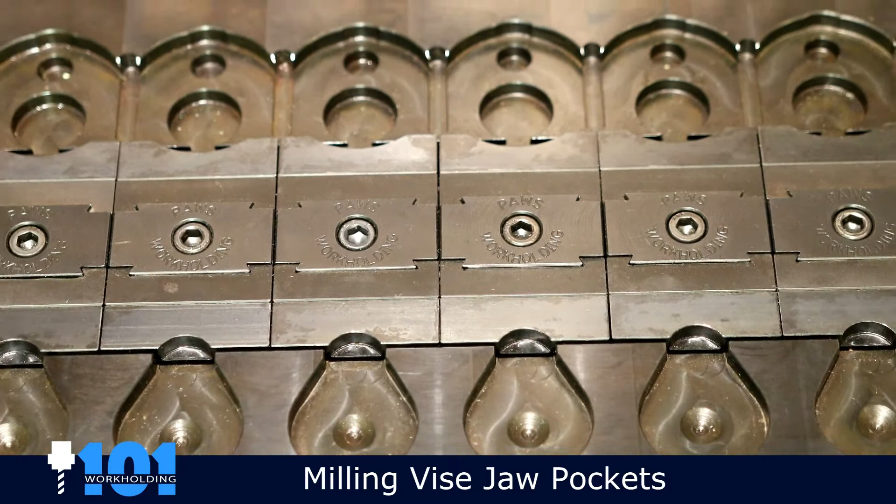So we have a production facility here, and what you're seeing is an example of multiple pockets cut into a jaw set. Generally, to grip in this case a round saw cut billet in the first orientation, and then machine the part complete in the second orientation.

So how do we grip a round part in our jaw pockets? How do we cut these pockets out for both orientations? What are the things we need to be thinking about when we do this? This particular fixture will hold 8 orientation A parts and 8 orientation B parts for a total of 16 parts under the spindle on each load.

So the part that we're looking at fixturing up today is this part here. We call it a peanut because it's got a profile that looks a lot like a peanut shape. It's actually called a flange. It's got a boss on it, a couple of bored holes in it, and this is the part that we're going to process.

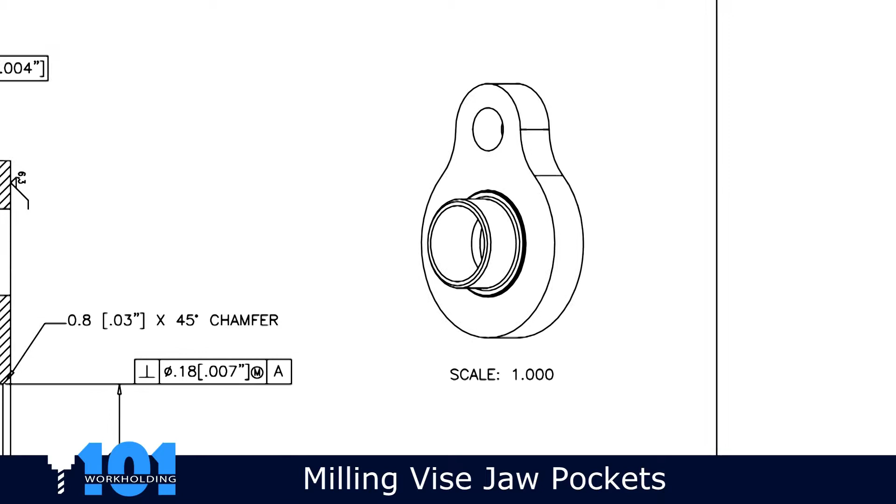It's generally made in 2 orientations. So we're going to need to cut pockets for our orientation A, which is the raw billet, where we're going to come in and cut our profile out and bore some holes, and then we're going to flip the part over for our orientation B and make the part complete.

So once you have an idea of how you're going to process the part, in this case we're going to do 2 orientations, the next thing you've got to figure out is your material size. So we need to go through and figure out how to do that based on the part itself.

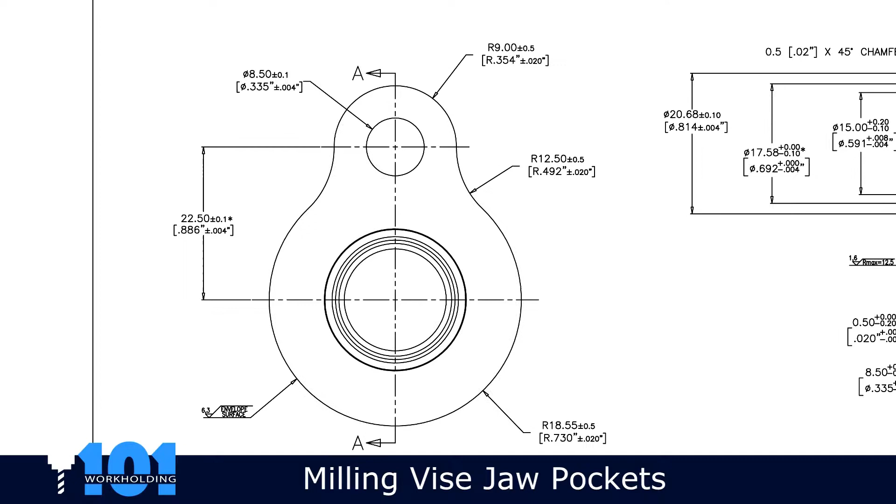So in looking at the print, when you add everything up, the part has an overall length of 1 inch 970. So we're going to go with a standard 2-inch size stock, to have about 30 thousandths worth of material to clean up, or about 15 thousandths per side.

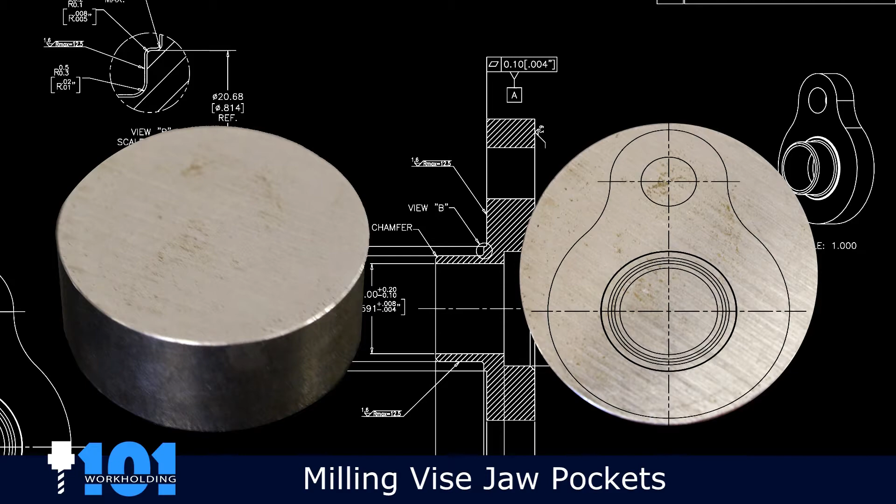In some cases, based on how your stock size varies, you may want to give yourself around 60 thousandths of extra stock to have 30 thousandths a side for cleanup. In this case, our stock's pretty consistent, so we feel pretty comfortable going with the 2-inch size stock.

So the next thing you want to think about once you pick your material size is your pocket depth, or how much material do we want to hold on to. In most cases, it's a pretty good idea to start with around 200 thousandths worth of material to hold on to. That's usually adequate to cut at the feeds and speeds that you'd like to be cutting at. So as a general rule of thumb, 200 thou is what you want to be gripping on.

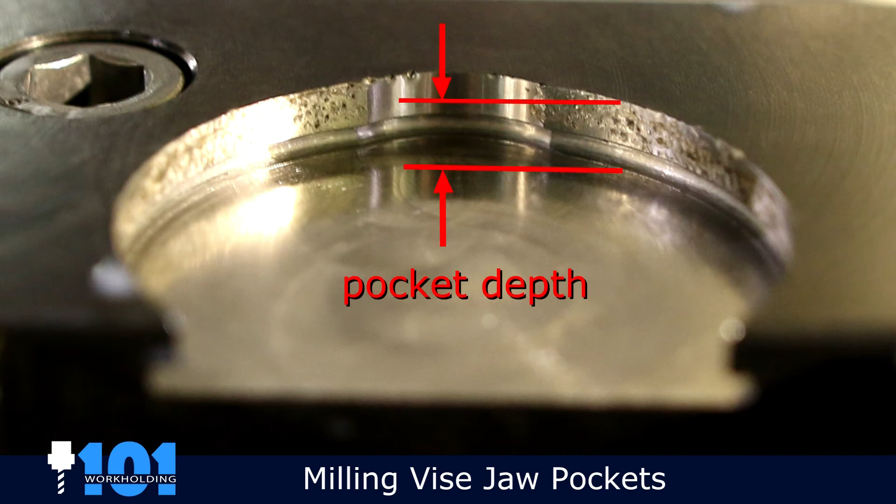When you start gripping on less than 200 thousandths, you can run into problems with your cutting forces exceeding the gripping power of whatever workholding system you're using, and at that point you're getting into toe clamping applications and have to be real careful about your machine feeds and speeds, or the cutting forces can rip the part right out of the jaws, and that's not a very safe situation.

One other thought about the amount of material you want to hold on to: obviously, if you want to hold on to more material to cut more aggressively, that's safer, but it comes at a cost, because the more material you're gripping, the longer your billet size saw cut is, so you're going to end up using more material. In a production milling environment, you want to optimize your billet length so you can cut as aggressively as you want, but use the least amount of material possible.

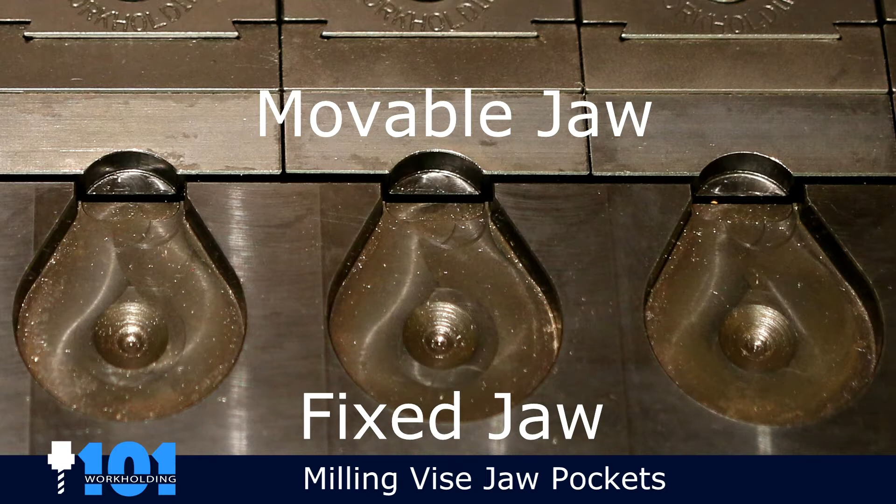So with most vise systems, you have 2 sets of jaws, a fixed jaw and a movable jaw. The general idea is to cut a profiled pocket into the jaws, so when the clamping is activated, you squeeze the part with enough force to obviously hold it during the cutting operation.

Vises come in many different shapes and sizes and have been around in the manufacturing environment for a long time, but the principle works the same on all of them. The movable jaw gets pushed against the part, and the part gets trapped or nested against the fixed side so that it's held with enough power to handle the cutting forces being applied.

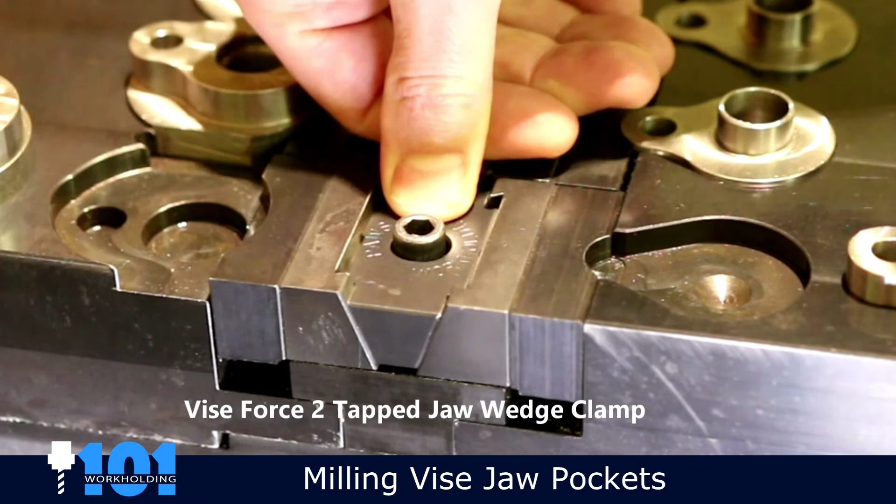Traditionally, most vise systems are opened and closed by hand or by manually cranking a handle. This is fine in most job shop environments or if you've got a low production run, but in production milling, the time it takes to manually open and close a vise system can really hinder your productivity and efficiency.

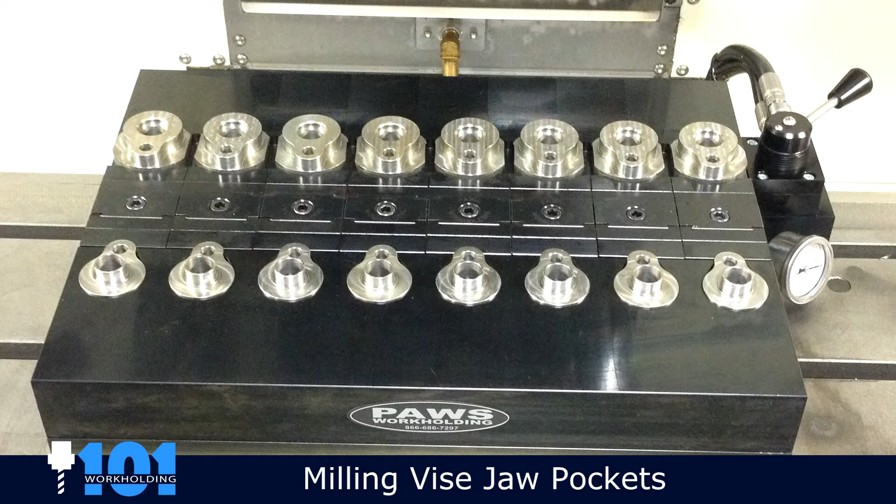The vise system we're using in this lesson is called a multivise. It's a system of 16 densely populated 2-inch vises activated using a wedge clamp. The wedge clamps are pulled down using a socket head cap screw, and they push a movable jaw in two opposite directions with equal force, generating up to 3,500 pounds of holding power per jaw.

These types of systems can be useful in production milling environments for a couple of reasons. First, these clamps are low profile, allowing you to get more part density under your spindle and take advantage of multiple part work holding. There are many benefits to this idea that we'll get into in an upcoming video and discuss in more detail.

Second, these systems are useful because the clamping can be automated. With the flip of a switch—in this case using hydraulics—in literally 2 seconds you can clamp and unclamp 16 parts in this multivise system. Clamping and unclamping manually takes a lot more time, so the loading and unloading sequence takes longer and you lose efficiency, resulting in spindle downtime, which is generally not good for a production milling environment.

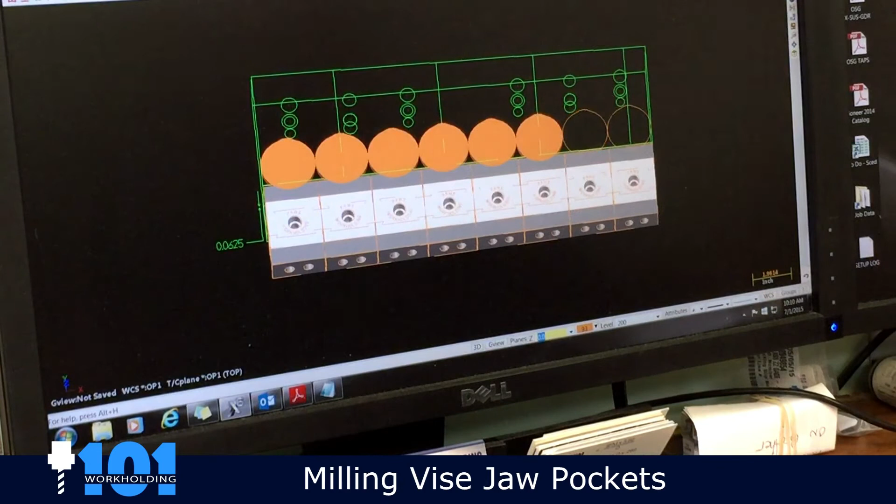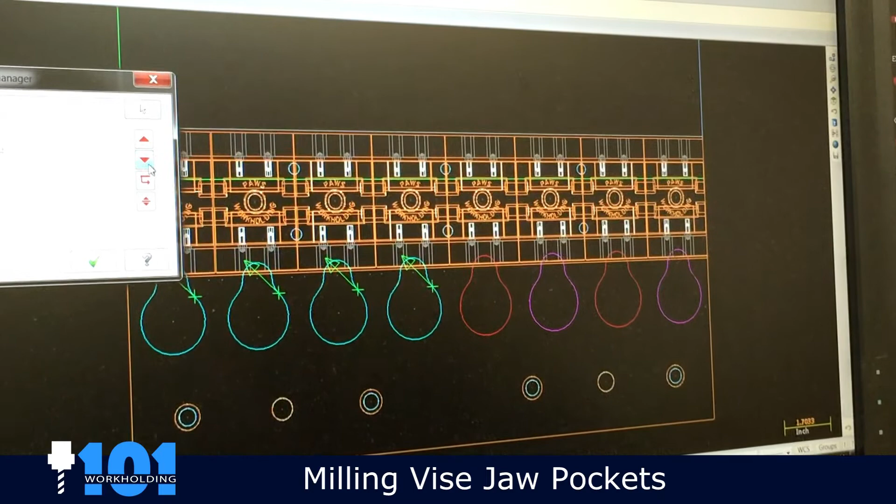So let's get into the steps you need to go through to mill the pockets. Most manufacturing engineers or machinists, once they have the material size picked, will pull up a CAD model of whatever jaw set they're using and draw the pocket profiles into the jaw sets on both the fixed and movable side of the vise system. The CAD program will typically create the machine code needed to cut the pockets based on the tool information you feed into it.

Once you have the program written to cut the pockets, you'll put it on a jump drive or something similar, take it out to your machine, load the code into the CNC machine, and have the vise system located on your table. You'll begin to prep the vise system, create zero points, get your shim set out, and we're going to get into the purpose of the shims when machining pockets into vise jaws.

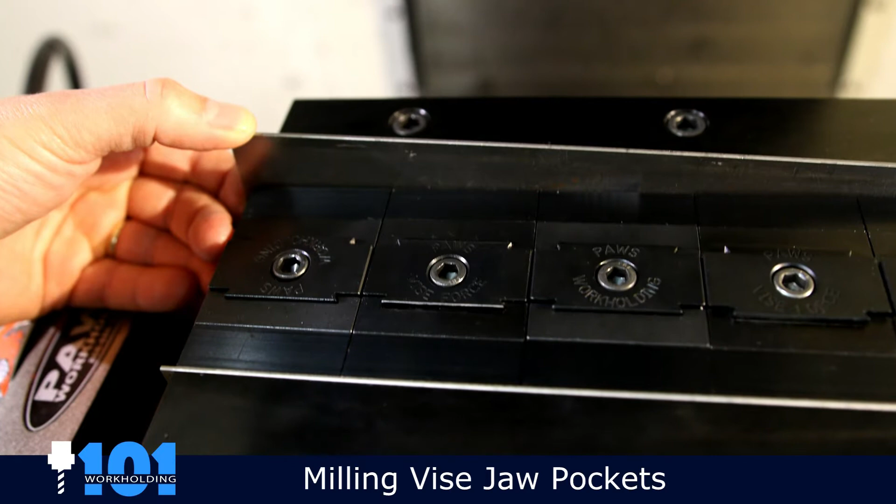You'll need a shim set to put in between the fixed and movable jaw. The shim sets we use are about 1/16 of an inch, or 62 thousandths thick, and they work pretty well for us. You put the shims in, tighten your vise system down or clamp, and then machine the pockets.

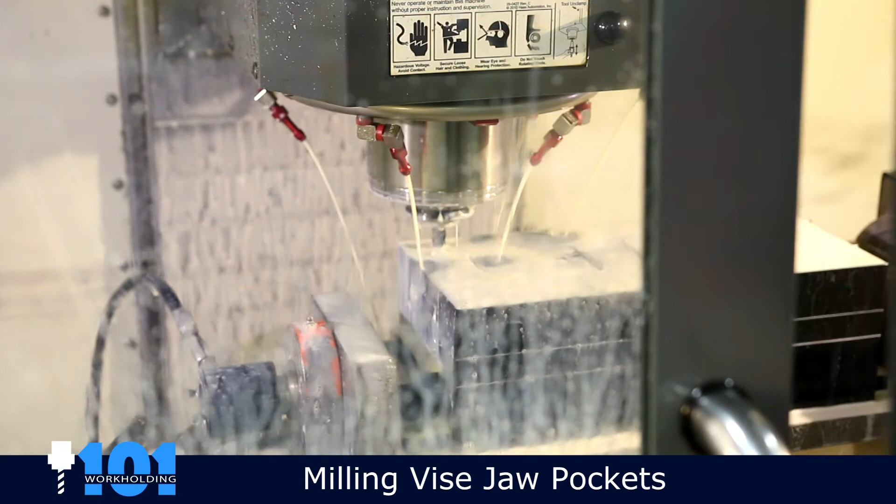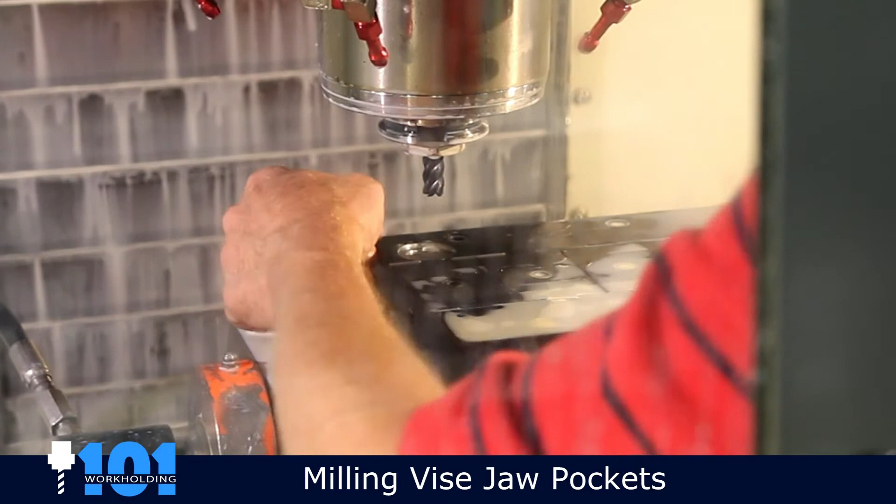The shims are an important piece of the process because if you machine the vise jaws without using them, you could run into a lot of trouble with your holding force or gripping power when you actually clamp your vise system. In other words, when your vise system closes, if you machine the pockets without the shim set, the travel in your jaws will bottom out at the same time you start gripping the part, which won't create much holding force, and it's highly likely you'll rip the part right out of the jaws—creating a dangerous situation.

So by using the 60 thou shim set, what that allows your vise jaws to do is give you that 60 thousandths worth of travel once the jaws engage the part, to hold on to it properly so that you don't have an issue with the part being ripped out of the pocket.

So let's move on and discuss a couple tips that'll help you in your work holding practices and make your processes more effective. One of the first things we want to talk about is something we call the 75-25 rule.

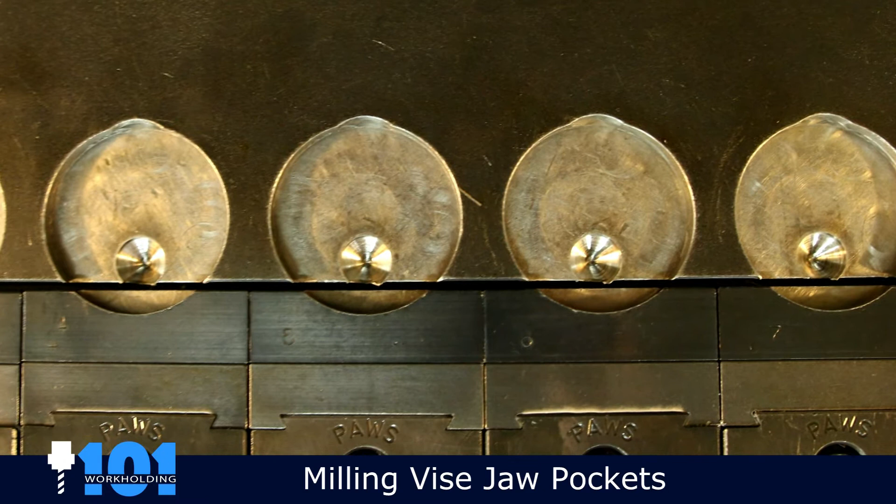It has to do with the position of your pockets in the movable and fixed jaws. You're going to want to machine your jaws so that 75% of the part is seated on the fixed jaw, or the non-movable side. This allows a little more rigidity and the ability to locate the part properly, and it also helps with keeping the part flat and provides more of a base for tapping the part down.

Another work holding concept we want to discuss is this idea of 2-point, 3-point, 4-point contact when gripping a part. In this example we're holding a 2-inch round billet, and it's pretty common to cut your pocket diameter maybe 5 thousandths bigger than the actual diameter of your material so the part will fit in and out of the pocket for ease of loading and unloading.

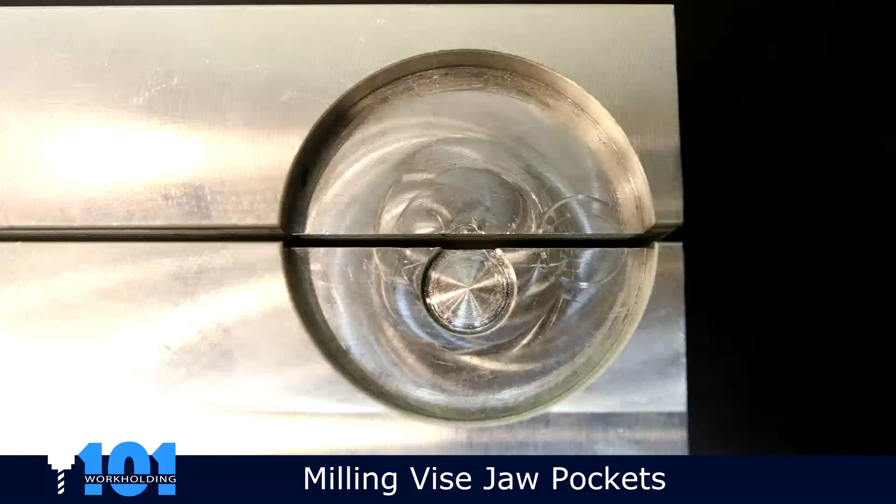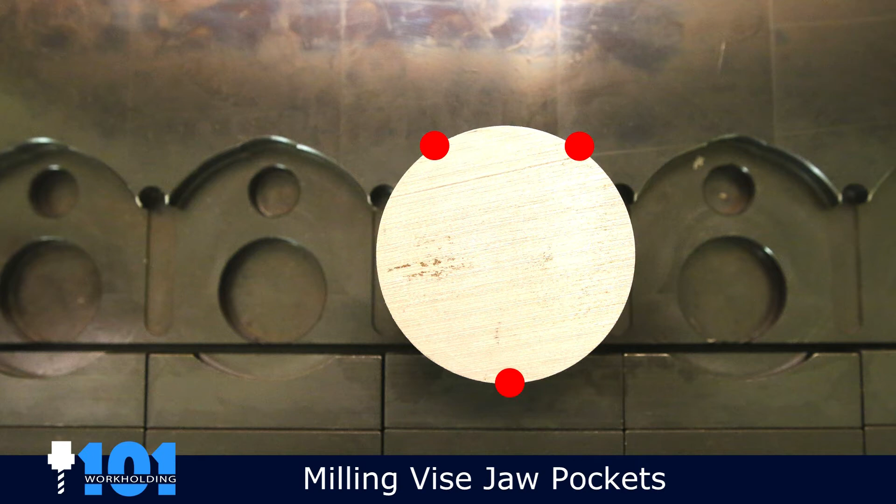What happens when you clamp the part is the jaws come together and engage it using 2 points of contact. Depending on how aggressively you're cutting, this can be okay, but what we've found is that gripping on 3 points of contact when holding a round part gives substantially more holding power. Here's how: if you cut just a little relief into the back of the pocket on the fixed jaw, that causes 3 points of contact to hold the billet when the clamp engages. Generally, more points of contact give you more holding power.

You can also cut relief into the pocket on the movable jaw in a similar manner, actually creating 4 points of clamping. That may be overkill depending on your application, but it does help in some situations based on what you're trying to do.

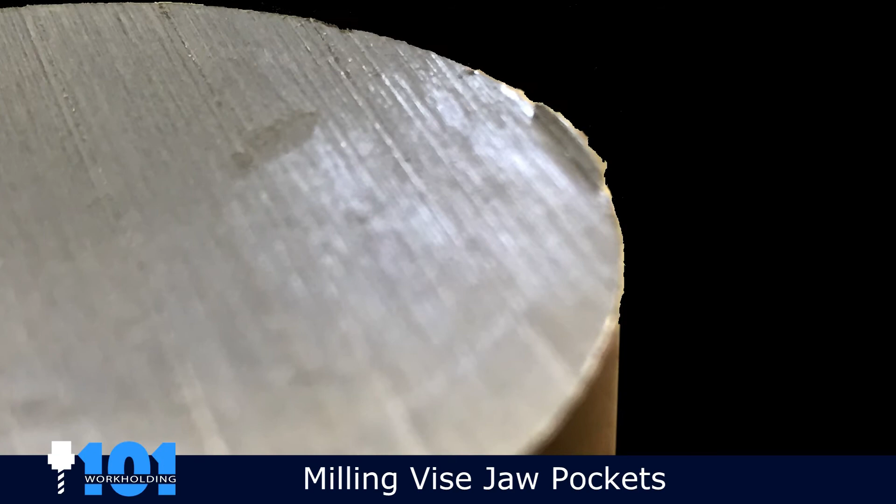Another idea that might be helpful is to put an undercut in the bottom of your jaw pocket, especially on the A orientation where in many cases you're using a saw cut billet. This is helpful because many times a saw will leave an edge burr. Burrs can often cause location issues in the fixturing and even cause misloads if big enough. The undercut helps eliminate the jaw from mashing into the burr in the corners of your pocket, keeps the part flat, and allows the jaws to engage the side of the part cleanly, minimizing the opportunity for the burr to affect the process negatively.

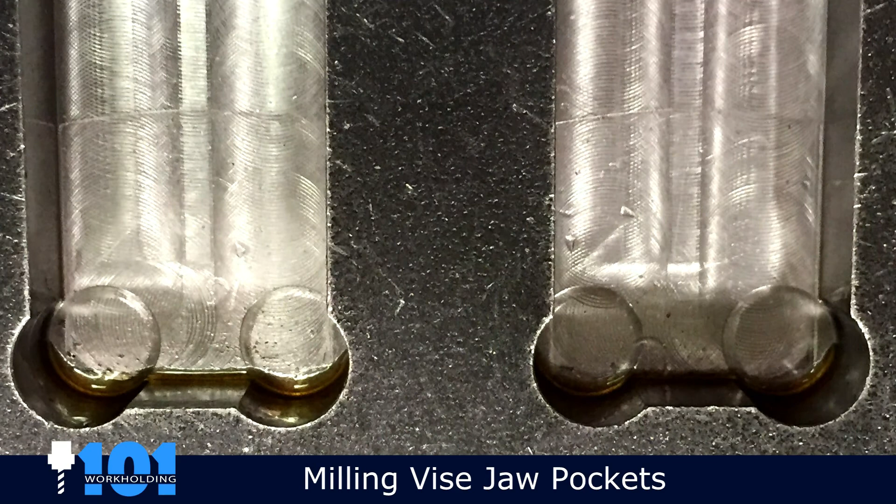The same idea holds true if you're trying to hold a rectangular part in your jaw pockets, only you're going to want to put the relief in the corners of the pockets, all 4 corners. If you cut some relief into the corners, any burrs on your billet will be minimized or become much less of an issue, creating more process stability on your floor, and a more stable process keeps the machine running and makes your QC department happy.

Just a couple more quick things before we end our video here. Up on our website, if you go to the clamp section of the site, you can get information on all of our clamps by going to the specific clamp you're looking for, and there is CAD data up there that you can download and pull into your CAD system to overlay onto your fixture plates when machining the jaws.

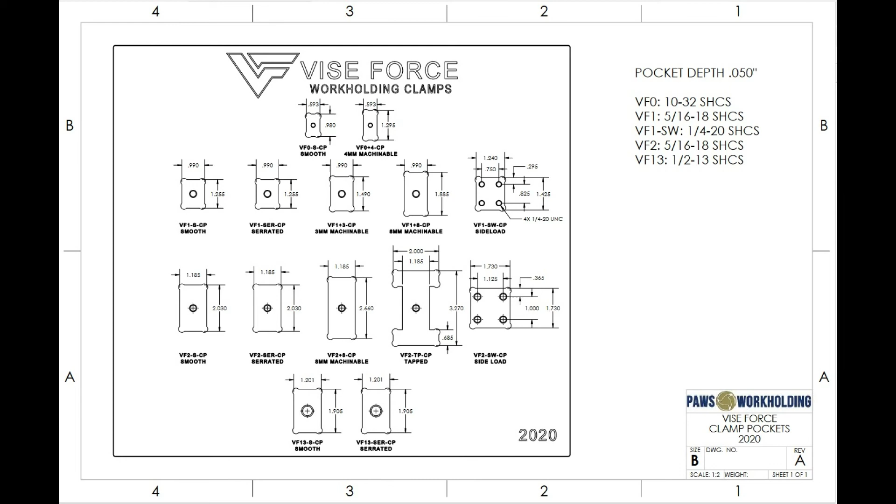We also have a clamp pocket size chart, and that's there. We recommend putting the clamps in a pocket on your fixture plate so they don't rotate at all. We also have a safe cut chart up there which tells you how far into a clamp you can cut before you'd really do any damage to it.

And then we also have our spring locators up on the site. Those are useful in fixture design to help locate your parts properly against the datums and make it easier for your operators to load and unload.